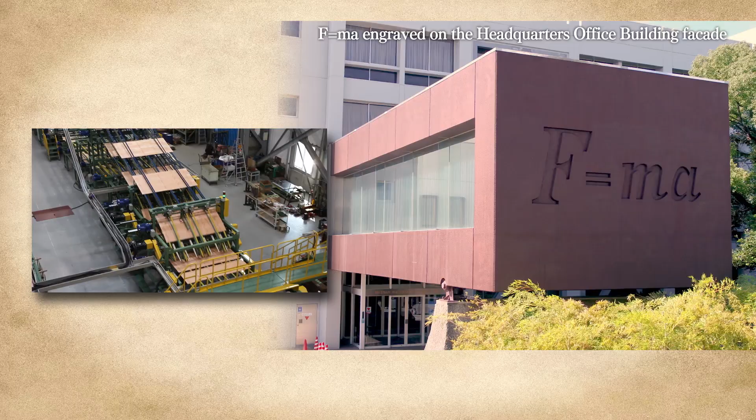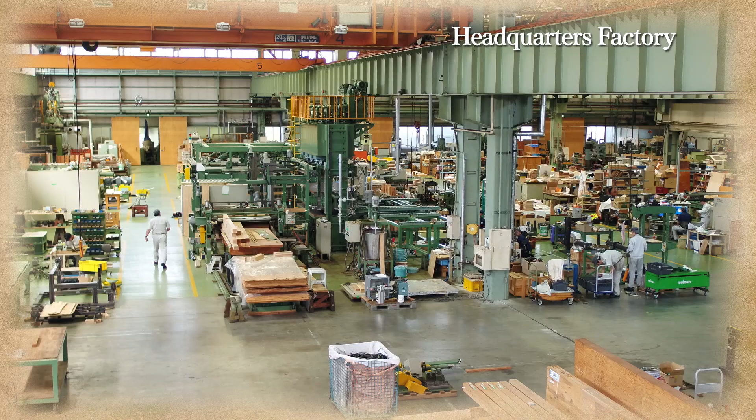Meinan Machinery Works is located in Obu City in Aichi Prefecture. We develop, manufacture, and sell various plywood manufacturing equipment, such as drum sanders, veneer composers, and rotary lathes. We are active globally, as we currently supply and provide after-sales services for our products in Japan and around the world.

Founding President Katsuji Hasegawa's life work is reflected in the corporate philosophy of a development-based business that emphasizes research and development. Hasegawa, who studied physics in night school and changed jobs 7 times, established Meinan Machinery Works in 1953.

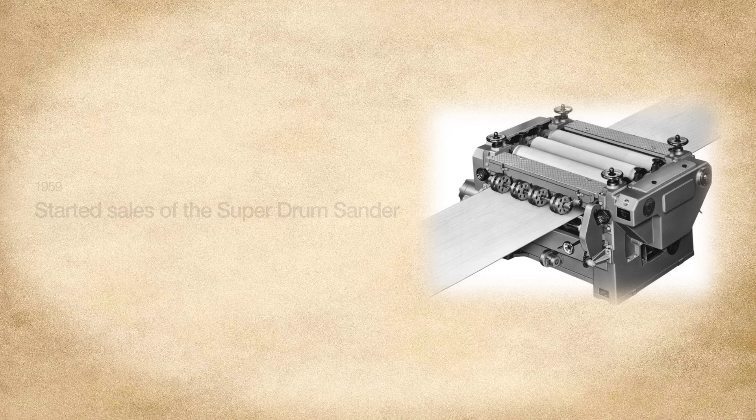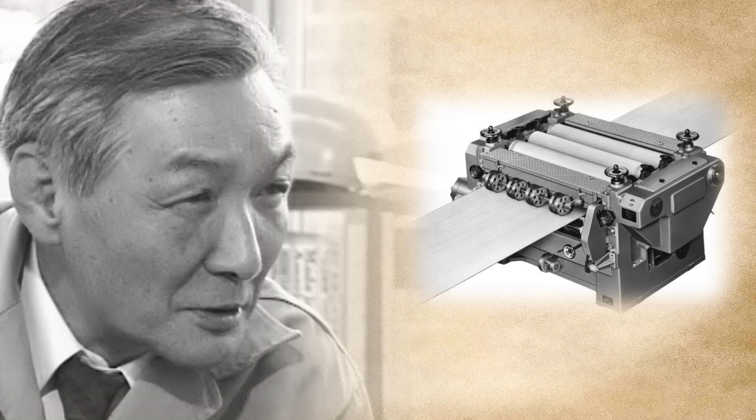The Super Drum Sander was the first ever product co-developed with his employees through trial and error, and it sold successfully. However, while Hasegawa reaped the benefits of their labor, he wondered why the product sold so well.

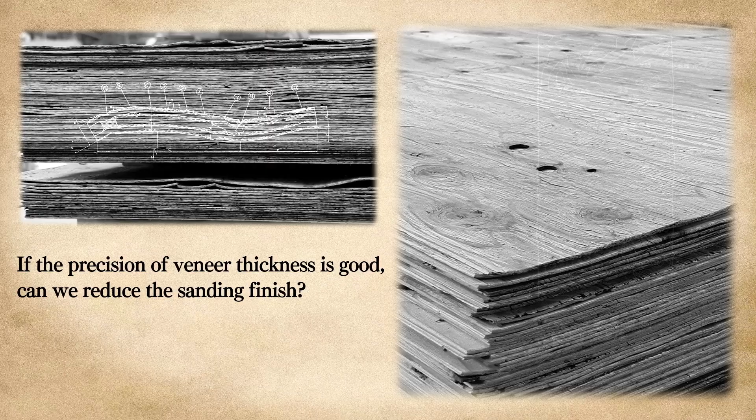If the precision of thickness of the veneer that makes up the plywood is adequate, the final sanding process can be reduced. The disparity of core veneer thickness particularly affects the quality. To validly process the core veneer, we started development of the veneer composer.

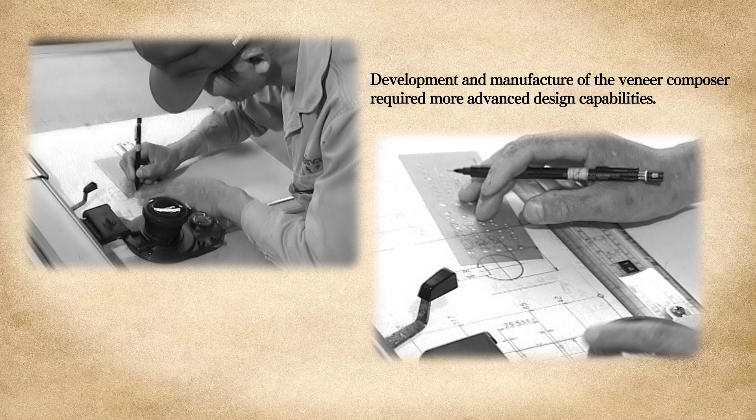But this new machine differed from the machines developed to date and required more advanced design capabilities. Employees needed even greater skills by comprehensively relearning science and physics.

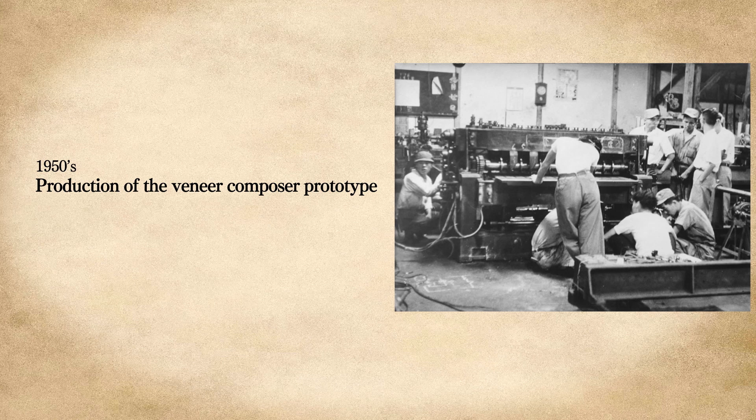Hasegawa led the way and started a study group. However, there was a mixed reception, and not all employees consented, with some employees even leaving the company.

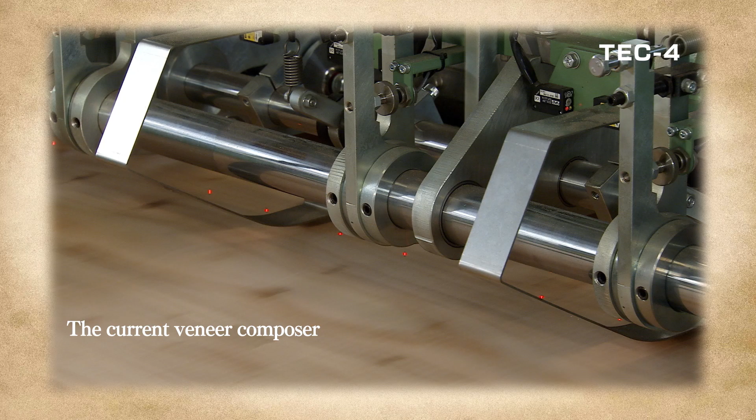However, Hasegawa persevered in imparting to employees a common language necessary for working towards the same goal. That is how the team of Meinan Machinery Works grasped the laws of physics and nature, confronted matters with great devotion, and unlocked their creative powers to develop the veneer composer.

This was the start of the Newton Club for the young employees at the time to study physics from the basics. Deepened understanding raised the standards of the technicians.

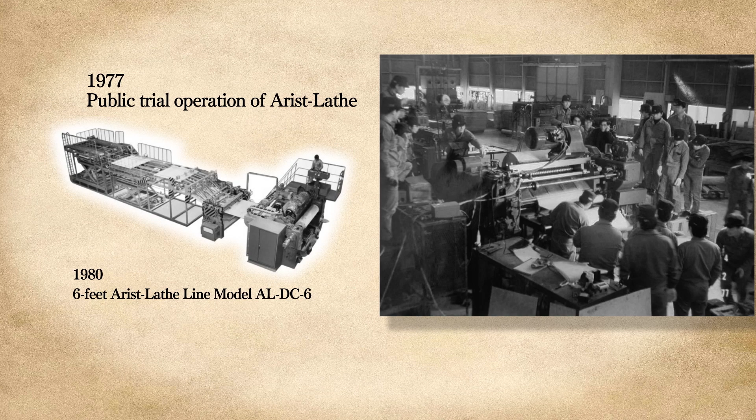By exploring the cause, a precise target comes to light, and by aiming higher, the next challenge emerges naturally. In 1977, which marked the company's 24th year in business, the Meinan employees' investigation into the fundamental issue of the precision and quality of veneer thickness led to the completion of their original rotary lathe and an Arist-Lathe.

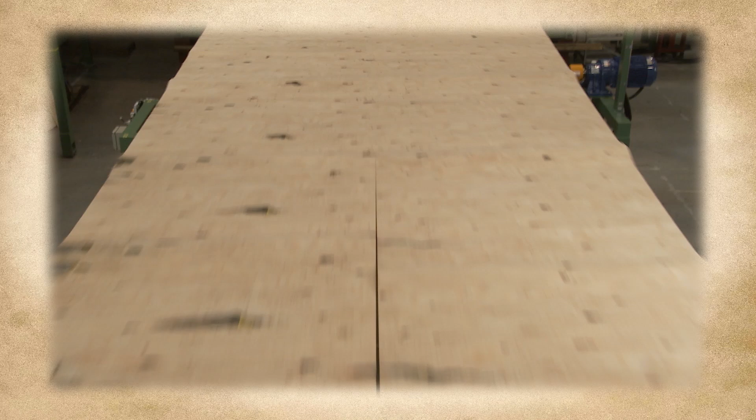This achievement was also by virtue of the study group that broadened the common understanding of the team members. In the long history of Meinan Machinery Works, approximately 150 models numbering roughly 6,000 units have been produced.

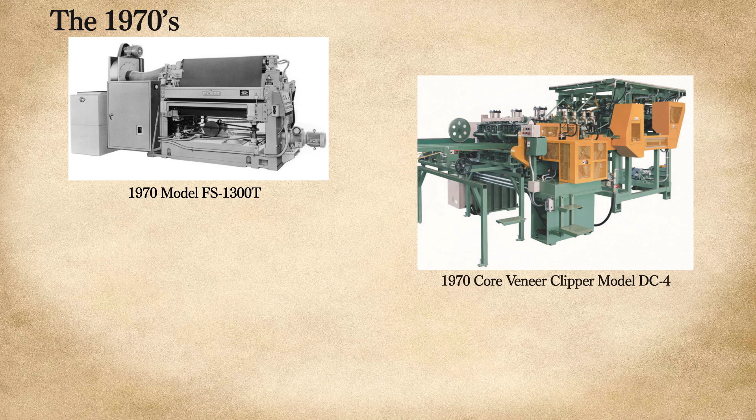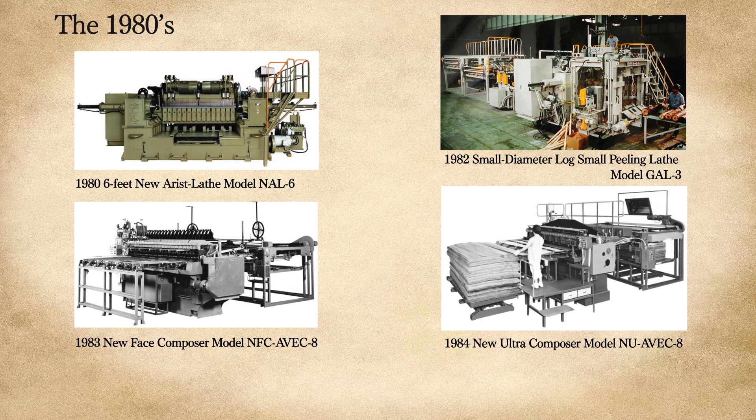Each employee who has been involved in product development carries the simple and universal law of F equals MA within their hearts. Wisdom and ingenuity are encapsulated in one product, as are the hypothesis and proof.

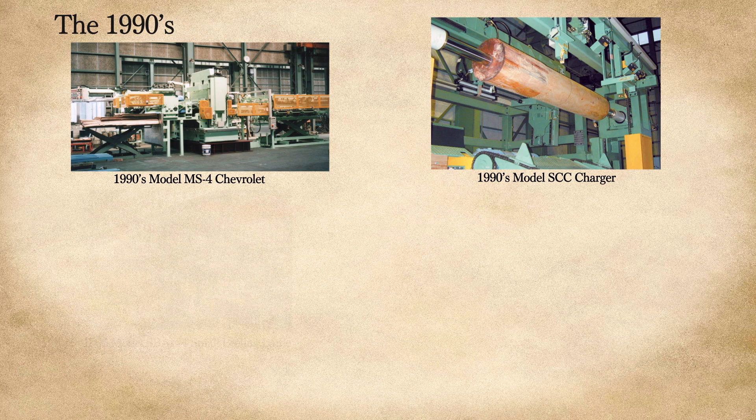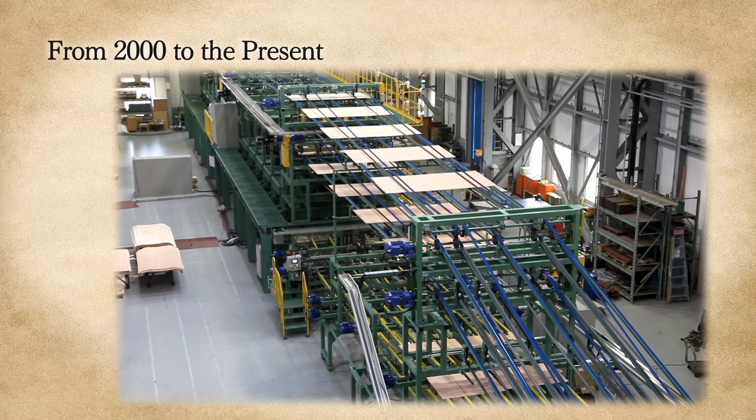We hope that together with clients, such products can support the plywood manufacturing business, make effective use of forest resources, and contribute to the preservation of healthy forests.

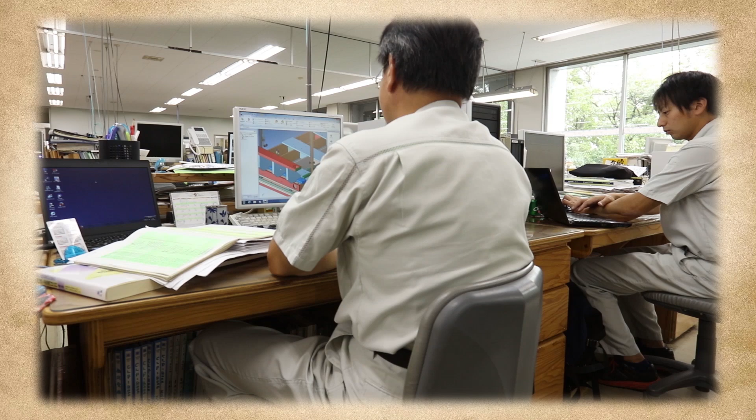Each employee assigned to development and design has CAD equipment of their own. Though the design tools have changed from being analog to digital, F equals MA has taught us that a scientific perspective and humble attitude towards nature's laws remain the same as always.

There are countless research documents stored in the headquarters library. They are the footprints of a development-based company.

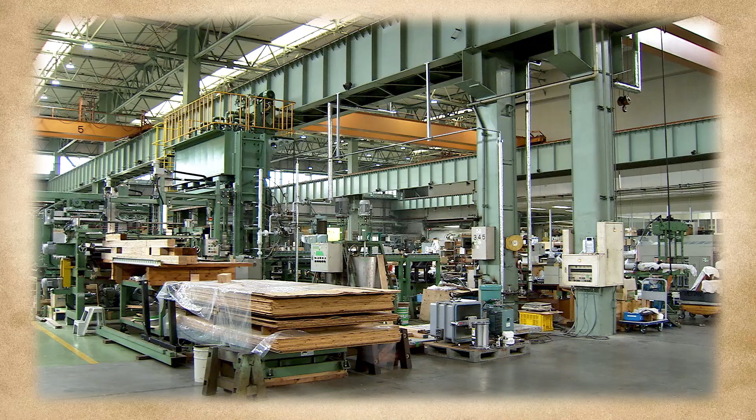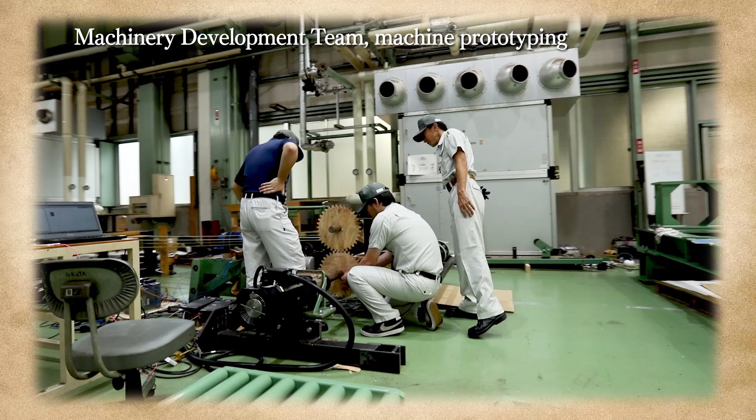No matter how outstanding the design concepts and ideas are, it's pointless if the product does not take shape. The material must be analyzed and processed, and the manufacturing and processing technologies must make it into a product. Our company greatly depends on concepts based on the universe governing laws of nature.

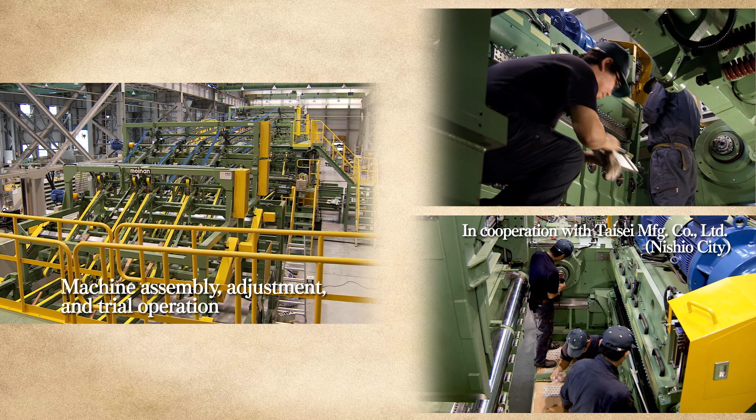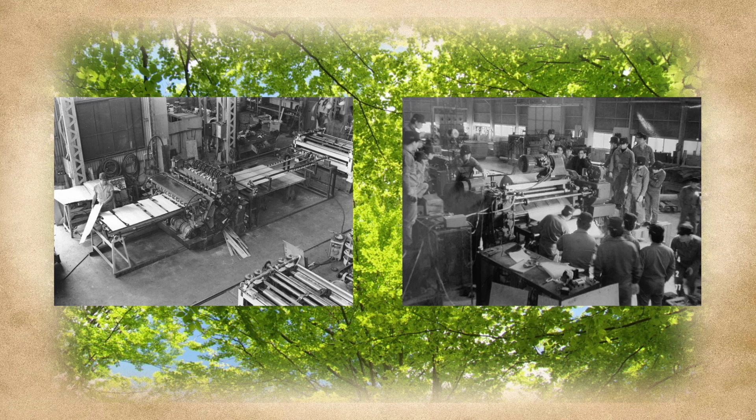Meinan Machinery Works aims to manufacture machines that contribute to the client's business while promoting environmental friendliness. From the 1950s to the 1970s, Japan's industrial technology solely pursued prosperity and abundance. In that industrial scene, Meinan Machinery Works started manufacturing machines in accordance with the laws of nature and focusing on the effective use of precious forest resources.

Meinan Machinery Works compels employees to return to the basics and relearn physics because that is where it all began. Founding President Katsuji Hasegawa declared at the study groups, don't depend on me, have confidence in the laws of nature. Being accepting and compliant with the laws of nature has not changed since the olden days.

It is that same law that also connects people to each other. We at Meinan Machinery Works will continue to base our foundation on F equals MA to connect employees, clients, and the world as a way to make our contributions to society.